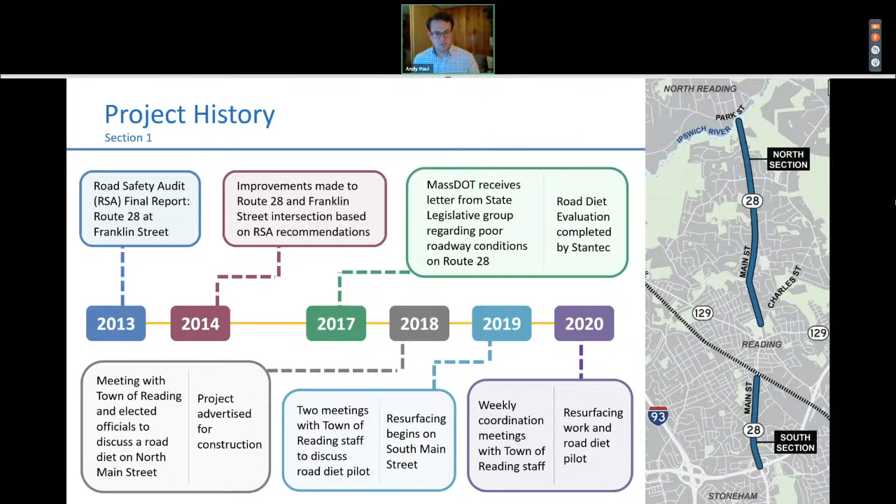We had meetings with town staff in 2019, and the resurfacing project began. And then since the beginning of 2020, we've had weekly coordination meetings with the town staff. And it wasn't until the latter half of 2019 where it was determined that we would also pilot the southern section of Main Street. In 2020, obviously, the road diet and resurfacing work went into place.

So the purpose and need of the project: obviously the condition of the roadway played a large factor in deciding whether or not to resurface the roadway. But then in digging through the data along this corridor, we compared the crash rate in this corridor on Main Street in Reading to the district, which is encompassing the Metro North area. And the average crash rate for that area was almost 1/3 of the crash rate that you see on Main Street. So there's a significant difference between the rate of crashes on this corridor compared to other corridors like it.

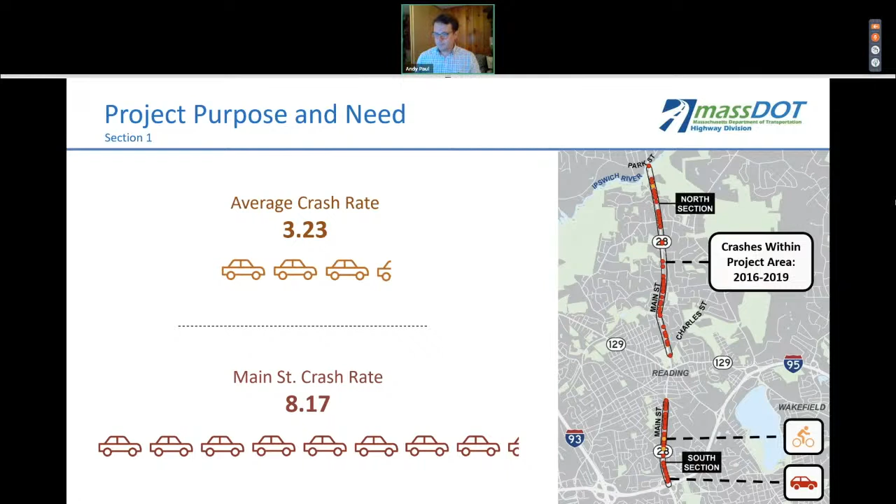The goals were to maintain a state of good repair along Route 28, improve safety for people using the corridor, in improving safety through calming traffic or reducing the speeds at which people are traveling around the Route 28 corridor. Improve accessibility for pedestrians. We have both state and federal standards that we have to meet as part of any project that we implement throughout the state. So from an accessibility perspective, implementing those goals, as well as meeting MassDOT's complete streets and healthy transportation policies. Again, something that we're doing across the state.

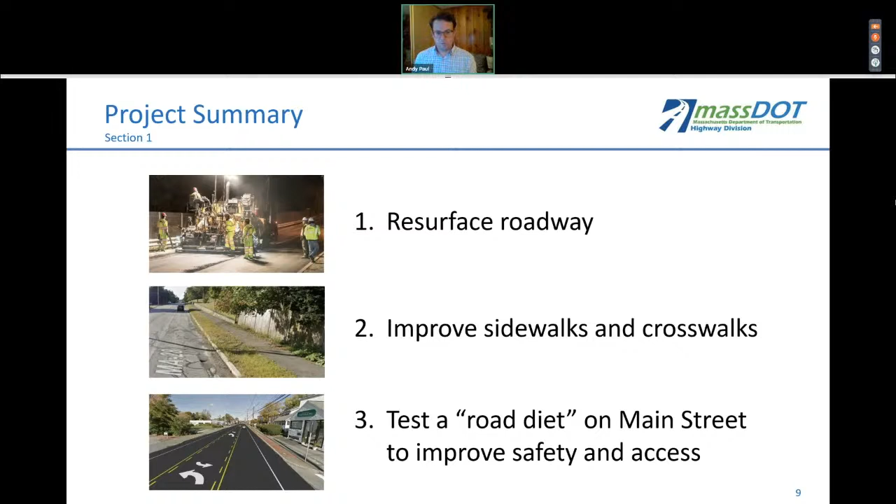To date, the roadway resurfacing has been underway. The modifications and improvements to sidewalks and crosswalks have also been underway, and the test of the road diet on Main Street is also underway, aimed to improve safety and access along the corridor.

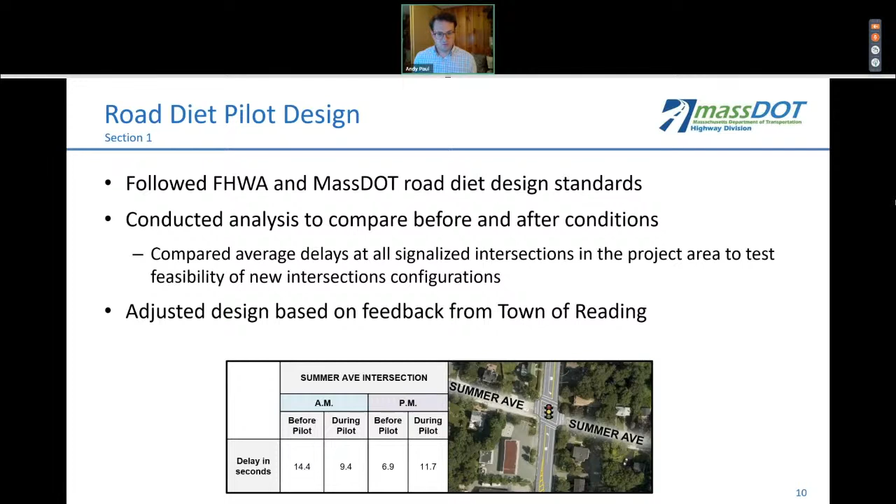For the road pilot design, we followed FHWA and MassDOT design standards. We conducted analysis of before and after conditions. So what were the traffic conditions at each of the signalized intersections along the corridor in the previous conditions, and then after the pilot implementation. And we compared the average delay at the intersections across the project area to test the feasibility of the new intersection configurations. And then we adjusted design based on feedback from the town of Reading staff, but also through correspondence that we received from many of the stakeholders and constituents within the town of Reading and using the Route 28 corridor.

So we'll now touch on the road diets and center turn lanes. Many of you might be asking, what is a road diet? Really what a road diet is intended to do is eliminate one or more travel lanes along a corridor and repurpose the roadway space for other uses. It improves safety and mobility for all modes.

Before the road diet, this is consistent with other corridors where we've worked: you have 4 lanes on an undivided roadway, so no median in the center, and typically you have narrow shoulders. But during a road diet, in this case you have a 3-lane cross section, the center turn lane is used for turning, and then just 1 lane in each direction, and then there's shoulders that are provided along the corridor as well.

The Federal Highway Administration, our federal partners, have studied road diets throughout the country and have found that road diets can have a crash reduction anywhere between 19 and 47%. This is a result of fewer travel lanes for drivers as well as pedestrians to cross, and allows for separated left turns at signalized intersections and more consistent flow.

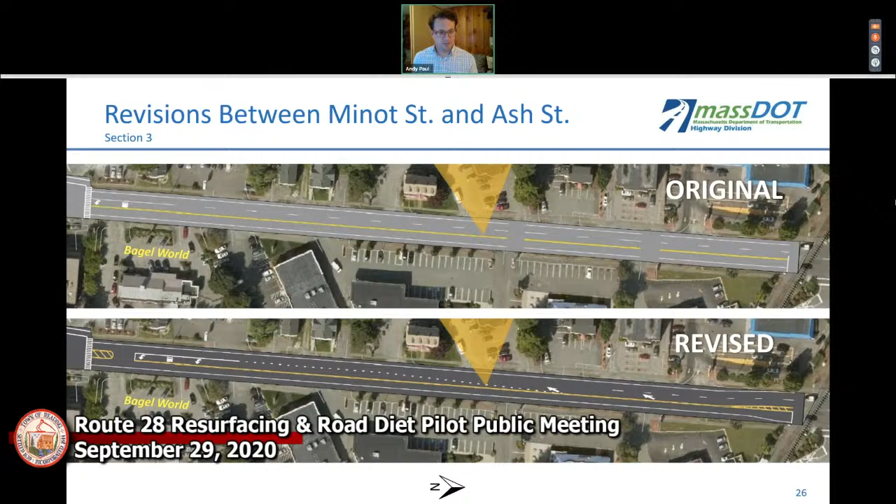So we worked very closely with town staff and other personnel to identify ways to alleviate the issues that we were observing in the field. And so we made these modifications to have a lane drop just after you cross over the railroad tracks when you're heading southbound towards 128. The left lane ends and you transition into a single southbound lane, and the left-only lane is designated only for folks accessing the driveways going in the southbound direction.

We also made revisions to Main Street near Summer Avenue. In this case, some of the access to the businesses was impacted by the diagonal striping that you see there in between Doyon and Dynamic Sports. And so we eliminated the hatching area, the diagonal yellow striping in the center of the road, and went with a similar treatment that you saw in the previous slide where the lane taper markings were put in place, and then just a more standard double yellow center line was implemented along the approach to Summer Ave, heading in the northbound direction.

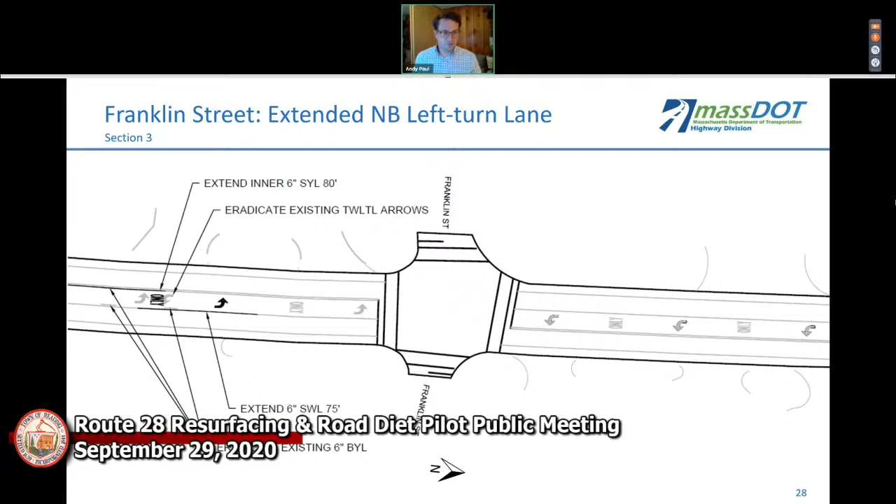Franklin Street, we just made some modifications there last week, where we modified the left-only lane heading northbound onto Franklin Street, as well as just south of Franklin Street, extending the two-way left turn lane closer to the intersection just south of there. And so those markings you can now see out in the field today. Those were made last week, and that was a result of feedback that we got from the public, communicated with town staff on some of the revisions that we were making, and then worked with our contractor in the field to make those adjustments.

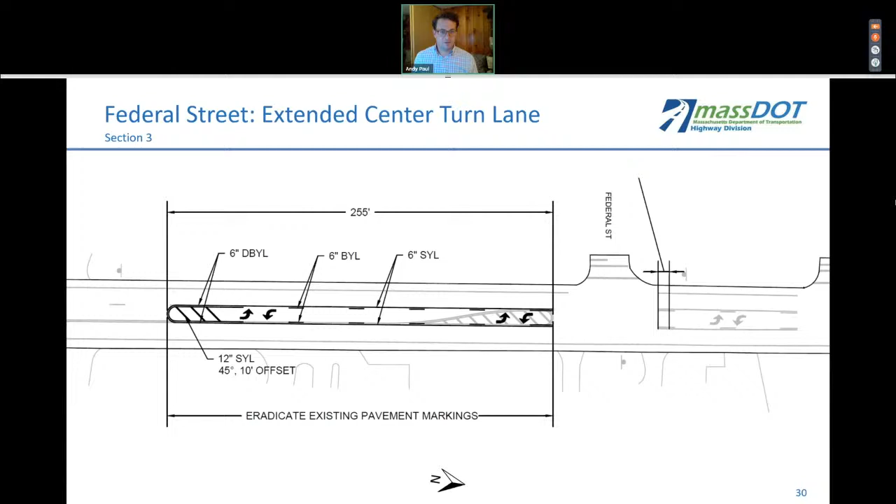Other adjustments that were made at Federal Street, we implemented a short two-way left turn lane, extending that two-way left turn lane from just north of Federal Street to just south of Federal Street. And then a minor modification at Charles Street. There was a gore area similar to what you saw at Summer Ave in the median area that was eliminated and just replaced with a double yellow center line.

And then just some minor modifications at Pearl Street to improve access into Rocky Road, but then also make it more clear where roadway users are supposed to be positioned as they access to and from the Pearl Street intersection. So just a quick sampling of some of the modifications that we've made, and you've probably seen those changes happening along the roadway as you've driven there.

The pilot schedule and evaluation. So this is really the biggest change that we've made to the approach that we set out when we began this process a couple of years ago to determine whether or not to pilot the road diet and how to measure the outcomes of the pilot. So we installed the pavement markings in 2020 and made revisions and began the sidewalk and construction work. In the summer of 2020, we completed revisions, completed construction work along the corridor,

and then you see on the bottom there, National Grid began emergency gas repairs and upgrades on South Main Street in the spring. They continued those throughout the summer. And then National Grid will complete roadway surface patches on South Main Street this fall. And that was something that was not in our project implementation plan. Based off of the emergency repairs that had to go in place, we coordinated very closely with the town of Reading as well as utility partners to simultaneously do these two projects at the same time. And we'll complete upgrades to sidewalk and driveways on South Main Street this fall.

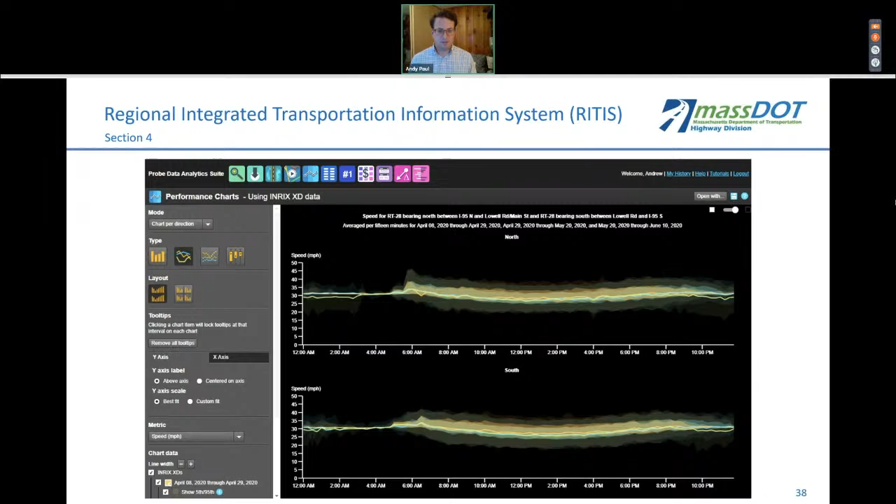What's best about this tool, though, is it also has archived information from 2019, 2018, and 2017, where we can go back and compare, say, September to September, August to August. And so we're not just looking at speeds and travel times in your corridor during the pilot. We can look at previous years as well.

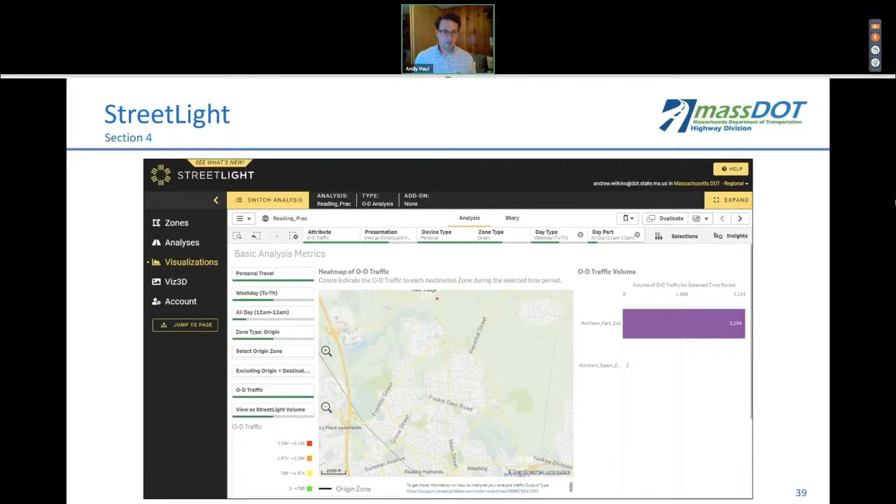We have another tool called StreetLight, which doesn't just look at major corridors, it also looks at side streets. And so this tool really takes a deeper dive into not just speed and travel time, but also volume. And through the analytics that this system runs, this is a screenshot of the tool looking at the town of Reading, where we have 100% coverage of all of the streets in Reading, and can compare as well historical information. So we can look at travel speeds, both northbound and southbound along the corridor, as well as volume information to identify where we're seeing any changes in volume compared to previous years.

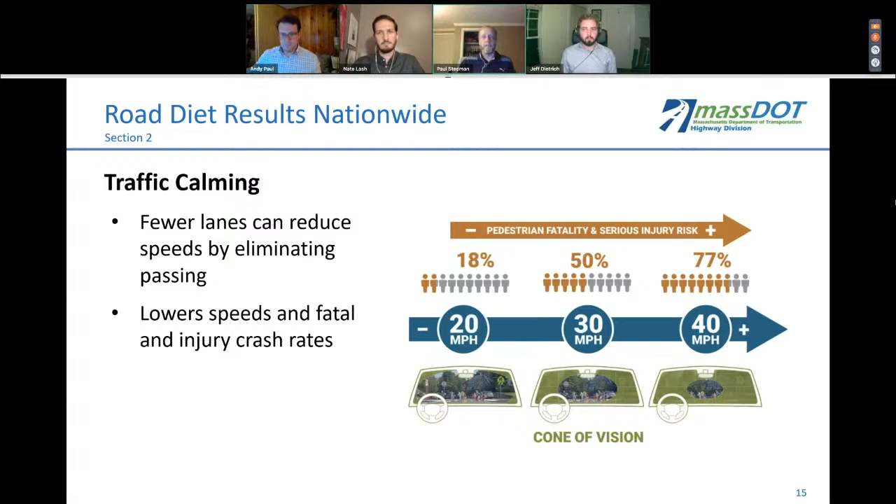Yeah, and just to the point, as Andy said, the goal of the resurfacing project is curb to curb and to update the facilities to bring them into a state of good repair. Obviously, though, if we are aware of particular issues, we want to try and address them to the maximum extent that we can in the design. So I apologize, Karen, if you had reached out to someone on our staff and they have not gotten back to you. If you could provide your address or a contact number, I'd be happy to follow up directly with you to get to the bottom of exactly what the issue is and see if it's something that could be addressed as part of this project, or if there's other opportunities to make some headway with it.

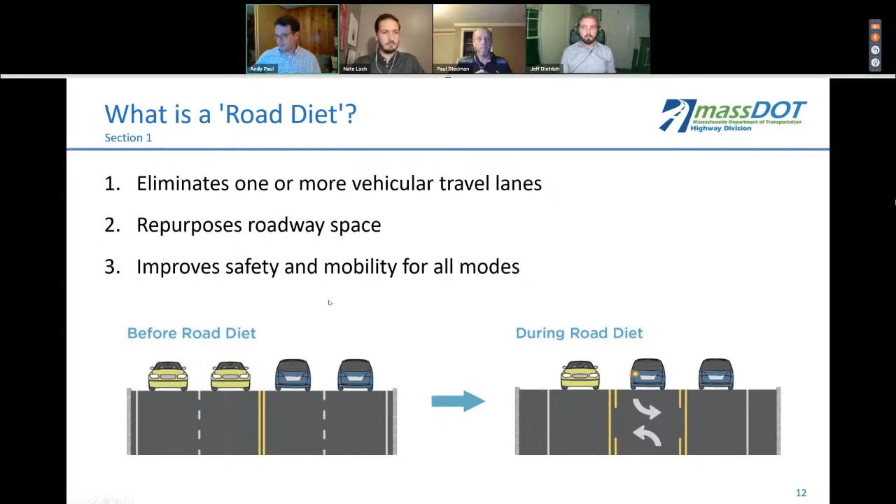Alrighty, so moving to our next text question from Nora Bucko. The question is, at some points the center lane is going up some hills. How to prevent collisions from maybe vehicles that are both trying to use the center turn lane at the crest of the hill? That's a great question, Nora. And so one of the slides that we put together was how to use the center turn lane, signaling in advance of getting into the turn lane, and then only when you're closer to your actual turn do you actually use the center turn lane. So it shouldn't be used for traveling. Let's see if I can remember which one that one is.

And yeah, so signaling your turn, reducing your speed, and then when it's safe to enter that center turn lane, only then should you be in the center turn lane to make your turn. And so at the crest of a curve, the crest of a hill, you identified it as a challenge where there are two vehicles opposing one another, both trying to make turns, and maybe 1,000 feet or 800 feet from one another, they can't see each other until you're closer on top of them. What we're trying to do through this public outreach platform, as well as others, is educate folks on utilizing that turn lane only when you're at or near where you're actually going to be making your turn.

There is one specific location where we've actually gone out, right near Bagel World. That was an email I had sent because there is no center lane turn going southbound on Main Street to take a left onto Avon Street. Is that to say that's intentional, that we should be taking a turn from the travel lane?

My next question is about the streetlight program app. Did I understand that right? Is there any prior information about the abutting side streets, travel on the abutting side streets, or is it only going forward, the data? Yep.

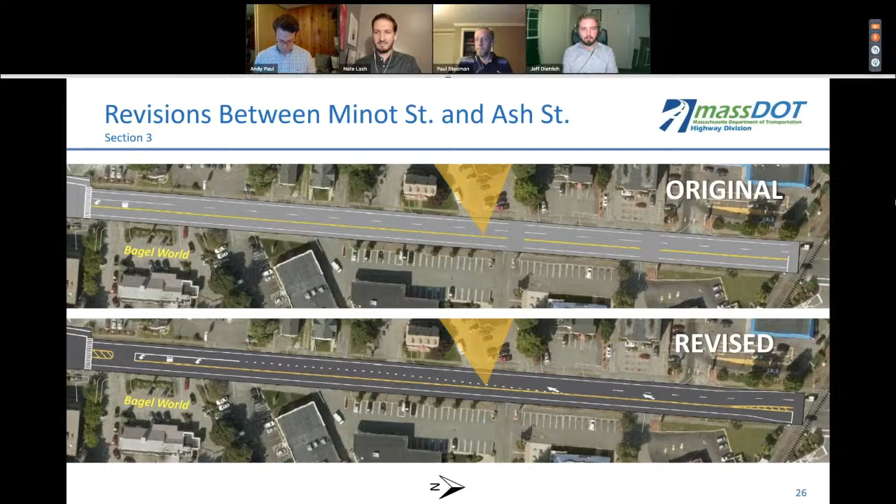And then finally, I guess I have three questions. What is the goal speed? One of your slides referenced the accident and victim impact at 20 miles per hour, 30 miles per hour, 40. What is the goal of miles per hour speed in these areas? Thank you. Sure.

Maybe I'll answer the streetlight data first because that's the shortest. We do have data. We do have historical data from streetlight. So it looks back to 2019 and 2018, and in some areas of the state, we even have data going back to previous years beyond that. So we're anticipating looking at a 3-year period as well, so we can compare those.

On the Bagel World, the outcome or intention of our revision didn't really change how we anticipated people would use the corridor. It just helped reinforce it. So this slide here shows both the modifications, and I'll step through how we intended people to use it. So when you're coming out of downtown Reading, heading towards the Bagel World, you go over the railroad tracks. We had put up signs from the very beginning that said left lane, must turn left. And so we naively thought that would force people to go over into the right lane.

What we did was reinforce the signs that were installed with pavement markings. So we put in that diagonal skip line that you see here, as well as those left diagonal arrows. So as you're coming out of the downtown, if you're in the left lane, you see the left lane must turn left, and those diagonal arrows as well as diagonal lines that indicate you should transition into the right lane for through traffic.

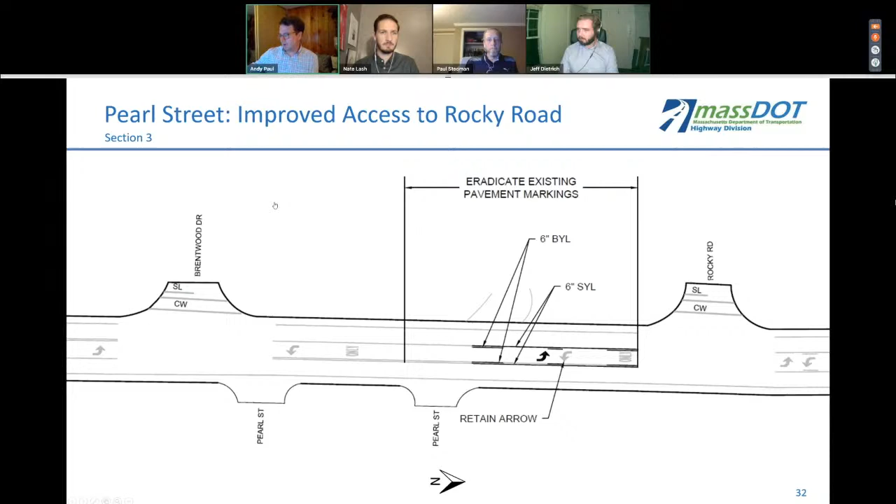But moving to the next text question, does every single left turn available have an arrow corresponding to it? For example, does every house or every driveway? Good question. No, there's a more typical pattern that's used. And so I'll just go to that graphic quickly. Along the corridor, these are some of the modifications you can see here that were put into place. So I'll skip through those, though. Sorry, just a quick second here.

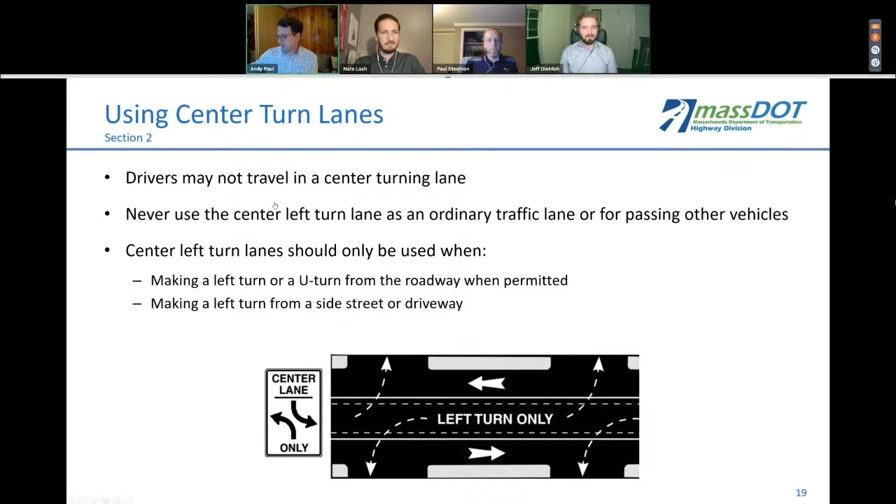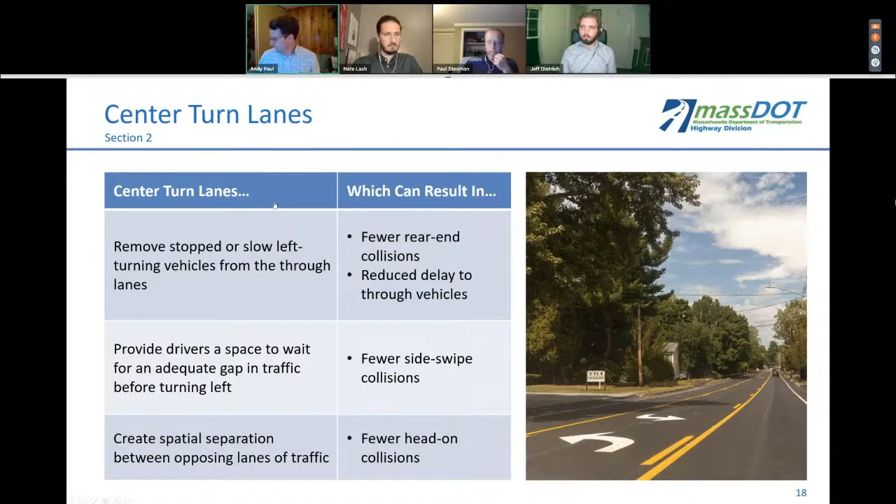Okay, so this image here is actually good. The left arrows are just supposed to be a typical indication where you can see they're spread out every 500 feet or so along the corridor, and they're paired up, one left arrow for each direction. So in this case, they're just typically spread out throughout the corridor, not supposed to indicate actual locations where the turns are supposed to be. And those are paired up with signs along the corridor as well, which say center turn lane for left only. So that answers that question, I believe, Nate.

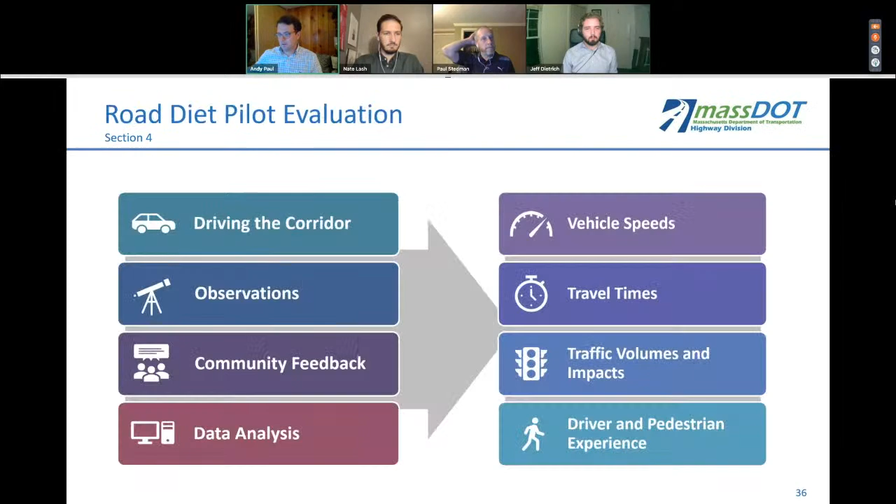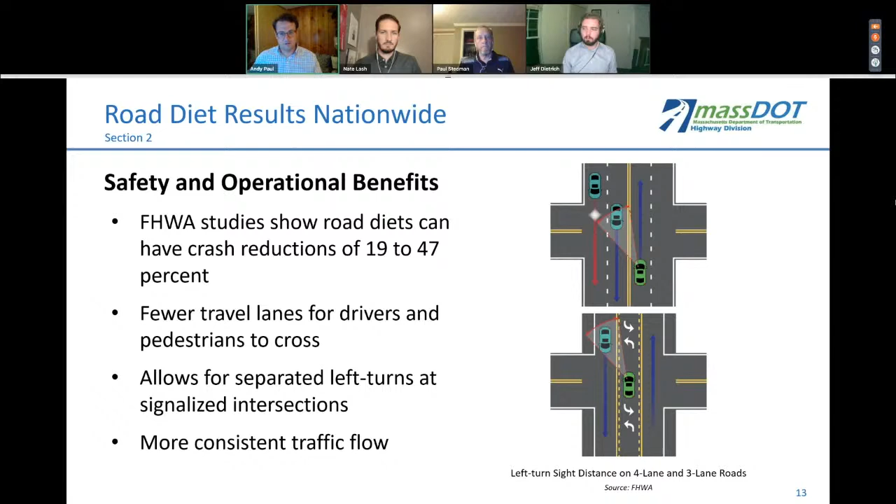None that I know of. So the 3 that I cited here in the presentation this evening were all local within Massachusetts. Summer Street in Hingham was a pilot similar to what we did here in Reading, and they saw a reduction in travel speeds. But in that case, they didn't look at crashes. In the Wellesley and then Boston, Newton, and Watertown examples on 135 and on Nonantum Road, you saw a reduction, obviously, in the crashes that I mentioned earlier. Those trends were similar to the trends that I cited from the Federal Highway Administration, where you saw a reduction of 19 to 47% of the crashes. So hopefully that answers Jeff's question.

Great. I want to say too, at the moment, I see a couple of folks who have raised their hand again, but I do want to make sure that we get through at least all of the text questions from folks who haven't had a chance to ask yet before we go back. So I do see you guys, and we'll get back. But Nate?

Great. So the next text question is, have you looked at the intersection with Bolton Street by the McDonald's? I've seen many close calls since the northbound lane shrunk into a single lane. It's very dangerous, especially when the train stops the traffic. When there are two lanes, it made it easier to flush the traffic through. So that's at the very northern end of the South Main Street section.

Yeah, the limit of the state highway layout in our resurfacing project just goes up to the railroad tracks and doesn't extend beyond there. So it kind of ends where MassDOT's jurisdiction ends and where the town's jurisdiction begins. Nate, is that just north of the tracks? Because I think that was one of the... I think just south of the tracks. Okay. The McDonald's is north of the tracks, right near Ash Street. It's in the town section, north in the town gap, north of our project limits.

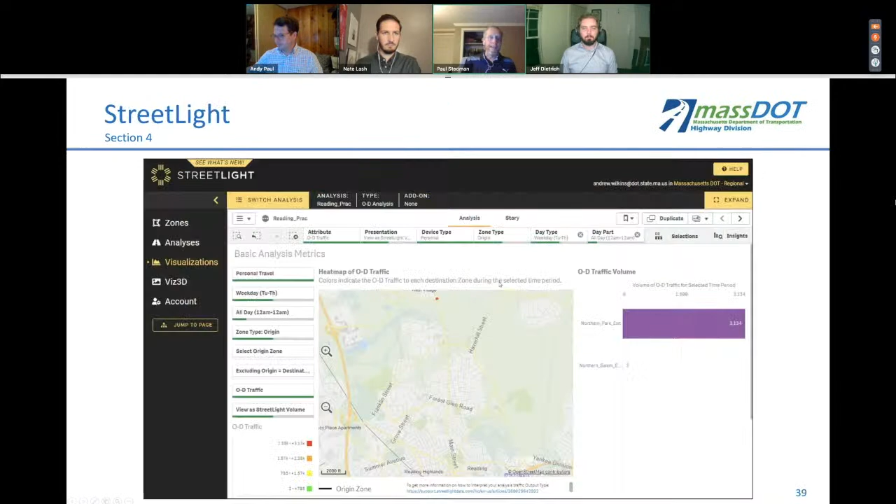The one thing that I would say is, I kind of equate it to the situation in one of the slides, I think, Andy, down at Doyon's in Dynamic Sports, where we had a similar type of thing where we had a lot of eradication and it was a very stark contrast in the before and after. Some of that has been eradicated since by the gas work, but some of it also has just faded over time as the polishing from the grinding gets worn off and the contrast starts to fade a little bit.

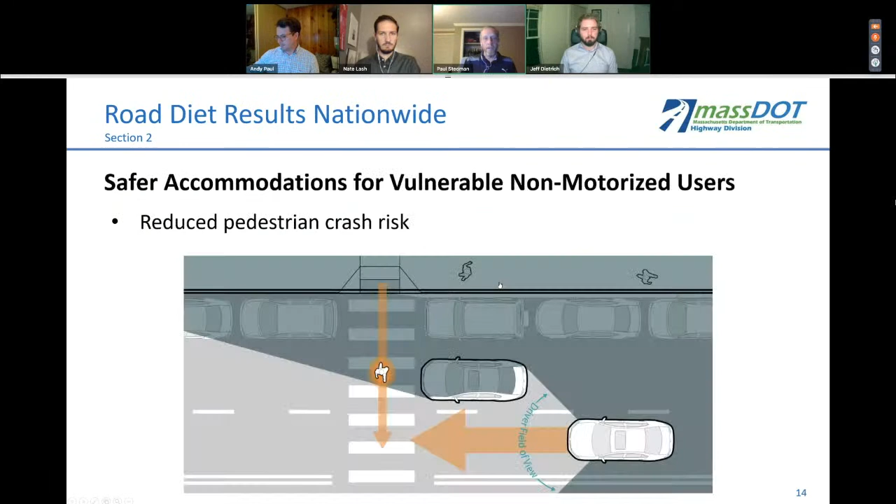But certainly, we can look and talk with the contractor to see if maybe they have any recommendations for kind of a surface treatment. The fear that I have is if you try to paint it black, so to speak, you just change the contrast from a gray to a black, and it's still there. So the challenge is trying to find something that blends in nicely and kind of recreates a blank surface, if you will.

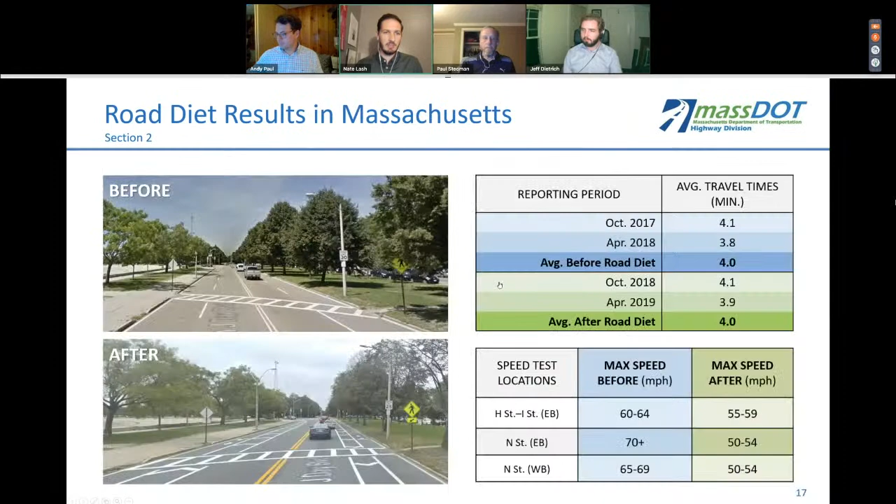Okay. Great. So the next question is, I'm still unclear regarding the left turn at Avon Street after the Bagel World area. Is it intentional for a person taking a left turn onto Avon Street to be turning from the travel lane on southbound Main Street? I believe this is for drivers traveling southbound on Main Street just past Bagel World and taking a left turn. Okay.

Sorry, hopefully I'm not making people dizzy here. So this is southbound traffic. It's going to be just off your screen, Andy. It's just south of Minot. Yep. But right now, I can try and take a stab at this, and you can certainly jump in and correct.

The way that it's marked in the field right now is that the two-way left turn lane, center left turn lane, ends just south of Avon, and it starts the transition into the exclusive left turn lane for Minot Street. So purely by the way the markings are out there now, the correct way to make a left turn into Avon Street would be from the travel lane, the single travel lane headed southbound.

Now, the way I kind of look at it, and what may be applicable, Andy, is if you can find the slide that shows the changes we made at Franklin Street recently, because I think that's very similar. We had almost the reverse situation there. Exactly. So consider that right now, Avon Street is right about where that last "only" is, right? We lengthened the exclusive left turn lane at Franklin.

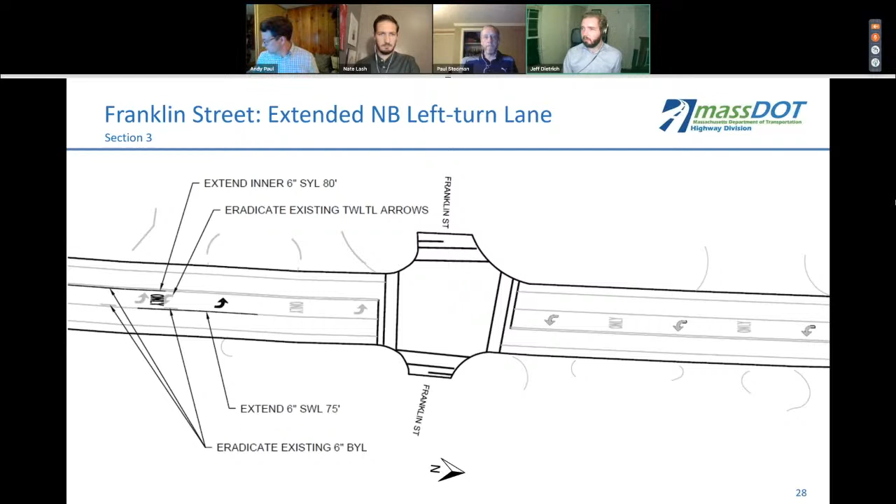Hello, how are you? Doing well, how are you? Good. Thank you for putting on this presentation. All the revisions that I've seen you guys make have definitely been an improvement. So thank you for that.

Two safety concerns that I can think of, and it's in your jurisdiction, but you haven't really done anything, is South Street. The South Street intersection is known for bad accidents. There was just one a couple months ago that was pretty bad, and it made the front page of the newspaper. Is there any thought on how to make that safer?

That's a great question. So South Street, maybe for folks who don't know, is down closer to the interchange with I-95. It's a signalized intersection with 2 lanes in each direction. It was looked at as being incorporated as part of the road diet pilot, and just because of the proximity to the interchange and the volumes that were observed at that location, based off our analysis and the modeling that we did, it wouldn't function as well.

That's not to say that some changes could not be made there. So I had mentioned earlier about the drainage issue and how, for the most part, we're keeping the existing curb width maintained throughout the corridor. And so I think in that spirit of trying to maintain the corridor, there wasn't anything that we could do as part of this resurfacing project.

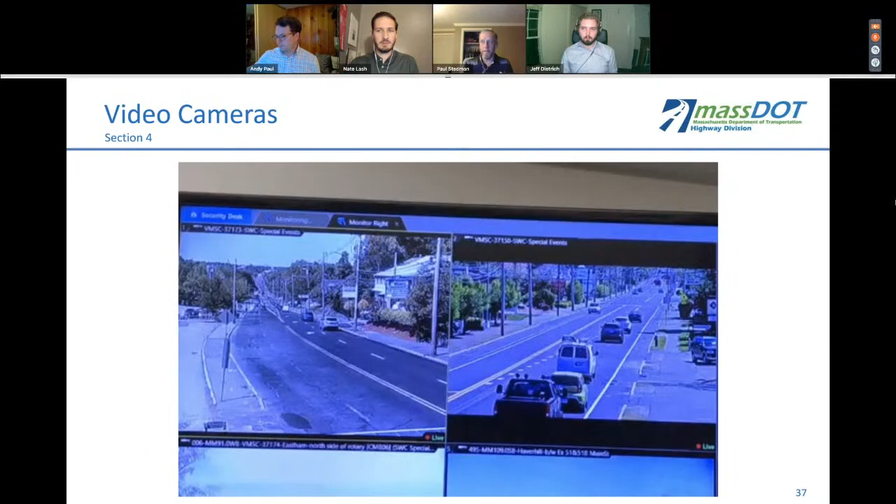Cool. Great. The last question we have that came over text is from Lawrence. Lawrence, I'm going to unmute you, and if you prefer to ask this question over audio, feel free. Andy, I think it'd be helpful if we could go back to the revised pavement markings at Minot Street. Hello. Are you on, Lawrence? Yes, I am. All right.

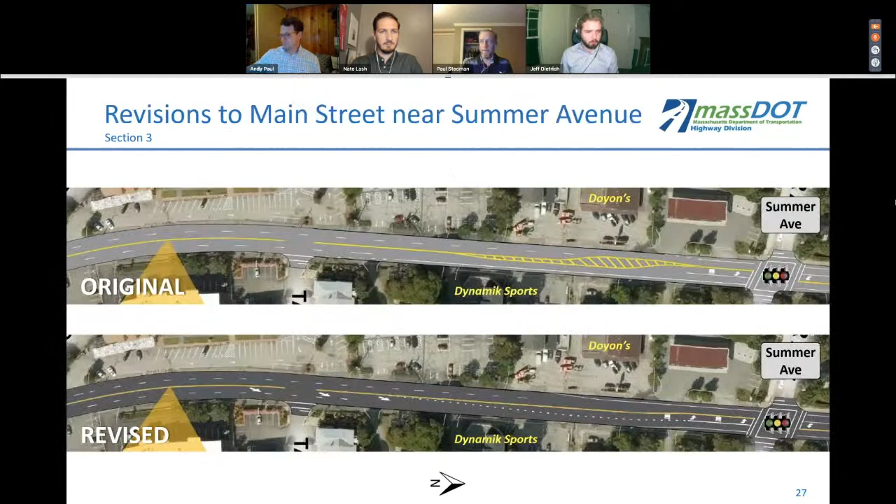So the question I texted in was Bagel World. You gave them a little bit of a shoulder, but with cars backing out going northbound into Bagel World, and then cars coming southbound in the turn only lane going left, trying to get by there at 30 miles an hour is pretty hairy. I know it is against the law to stop there, and you put a little tiny sign up further north that says no parking on a state highway, but maybe there needs to be some cross marks in that lane and some more signage that says it's illegal to stop on a highway. Okay.

Certainly, we welcome that input and are aware of the situation you're describing, where you're passing a vehicle that's pulled over in the shoulder adjacent to you, and as you pass that vehicle, there's another queue of vehicles in the left lane facing you. The revisions we made were intended to address some of those issues, but that situation can occur. So we're certainly open to discussions about how to improve that. I will say it doesn't seem like there's any one perfect solution there.

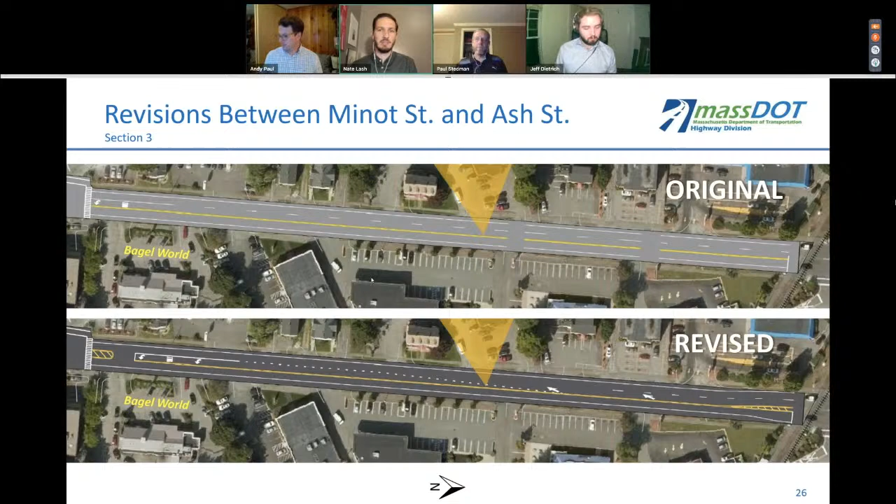Great, Andy, I think that is it. If you want to just head back to the contact info slide. Just to remind folks, we'll be monitoring the project email and taking new comments that come in from the interactive map, as well as we set up a voicemail. So if you were listening in or seeing this on RCTV, feel free to call that number and leave a voicemail, and we'll be checking those as well.

Thank you, and thank you to everyone who attended. Certainly Nate and Jeff have been a tremendous partner in this new COVID outreach experience. So thank you to them for their support and you all for participating in this virtual format. Certainly learning as we go, but getting better as we do, I'd like to think anyways.